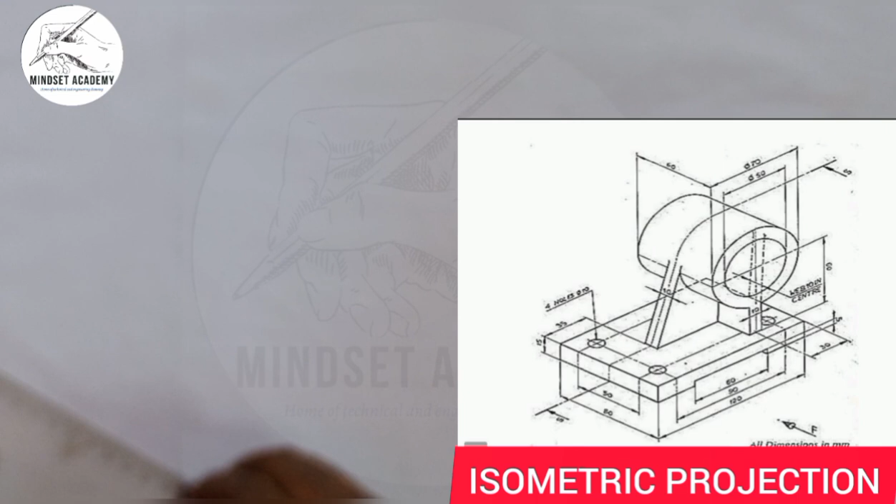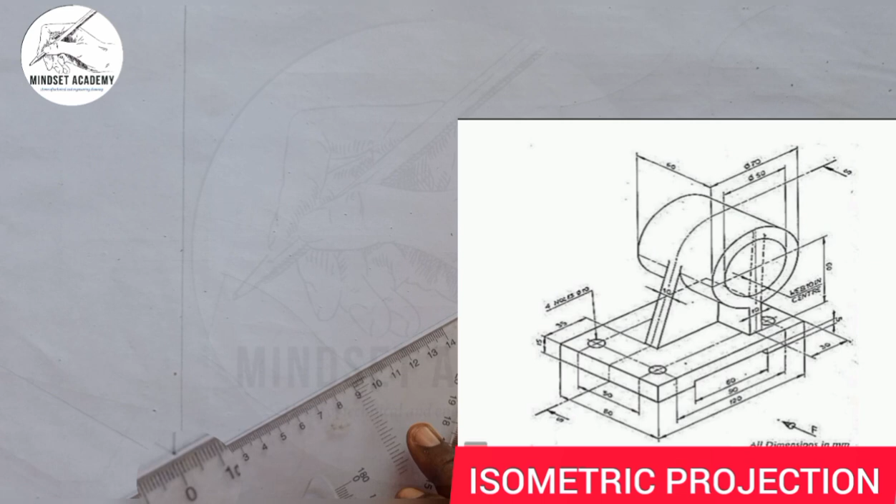Now, from what we have here, the entire length shown in the diagram is given to be 120. So from this point, I am going to measure 120. From 0 to 12 is 120, because they are all in millimeters.

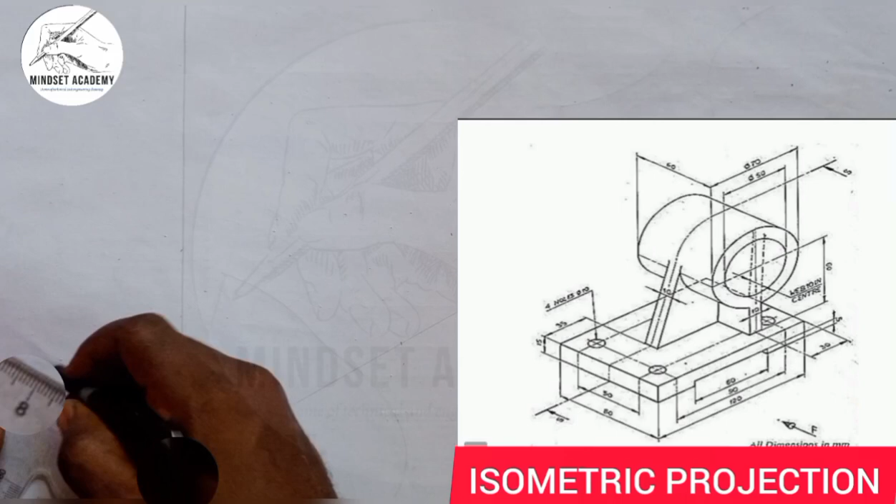Then the other part, I'm going to draw the width here, given to be 80. So I'm going to measure 80 from this point. From 0 to 8 is 80. And the height is given, if you add 15, from here to here is 15.

15 plus 60 is 75. And 75 plus 35, because the diameter of this outer circle is 70 and radius is 35, so when you add them you'll have 110. So the entire height here is given to be 110.

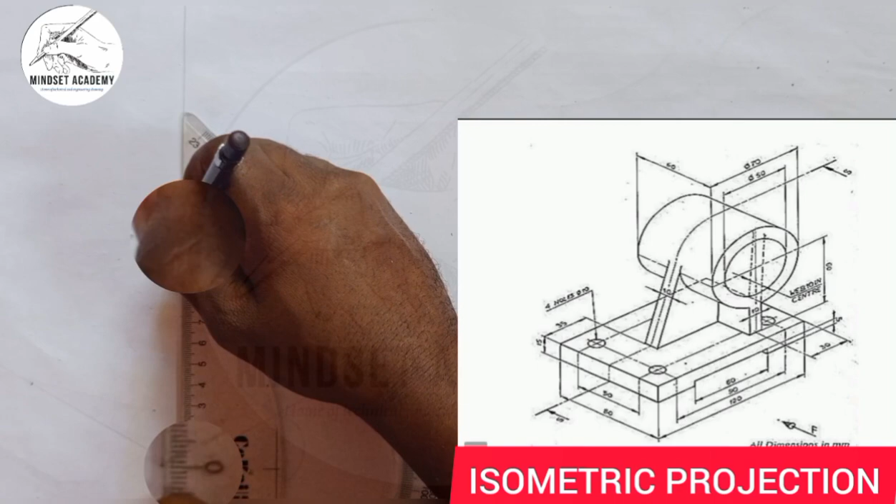This is 110, from 0 to 11 is 110. So I'll make it form a box, so forming a box I'll be having something like this.

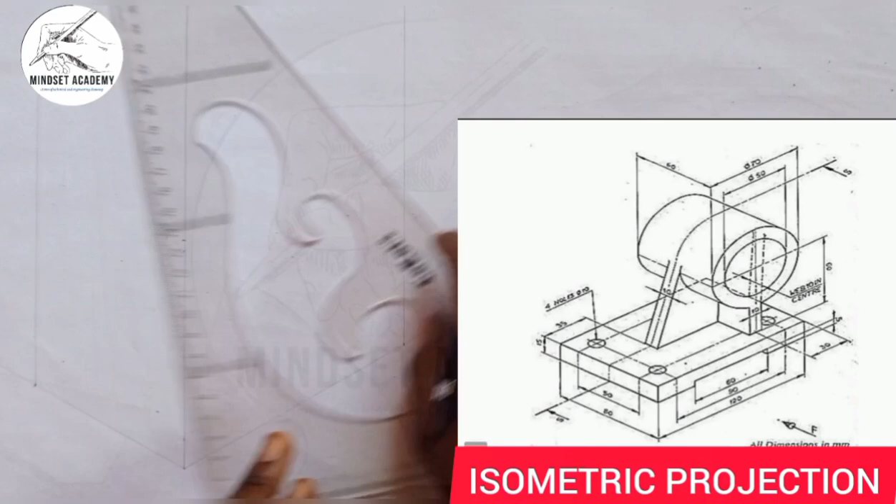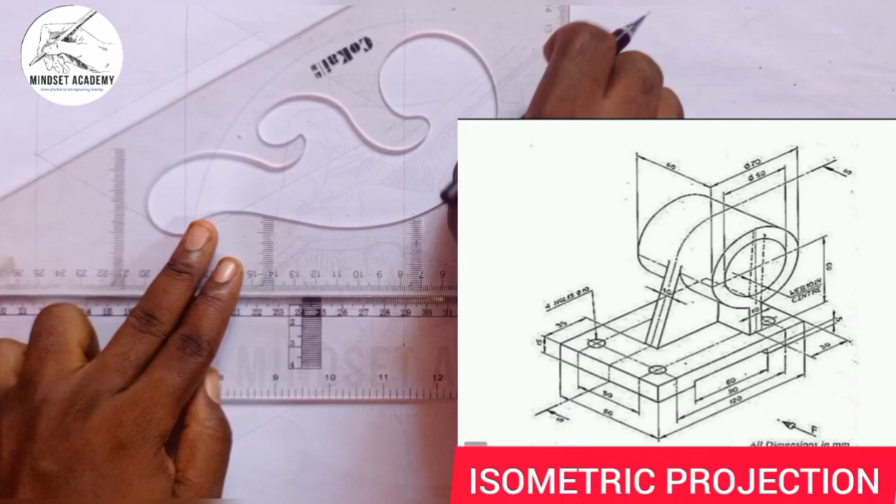From here I'll take it up, and I'll take it up. Then I'll close it up this way. Also I'll close it up too, and also I'll close it up too, and also I'll close it up too. So this is the box I have.

Then I'll start carving out my images from the box. First of all, we will start from the plane here. The entire length here we see is 80, and I can just take in that part, 80. So from here to here is 80.

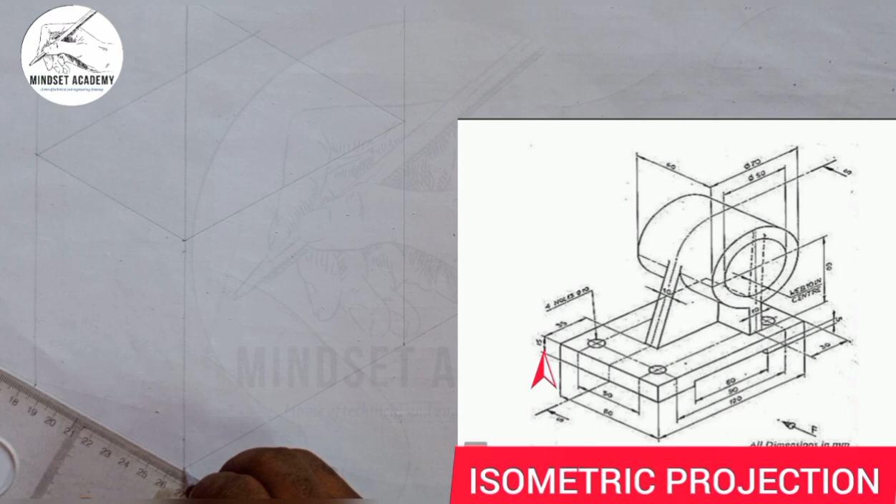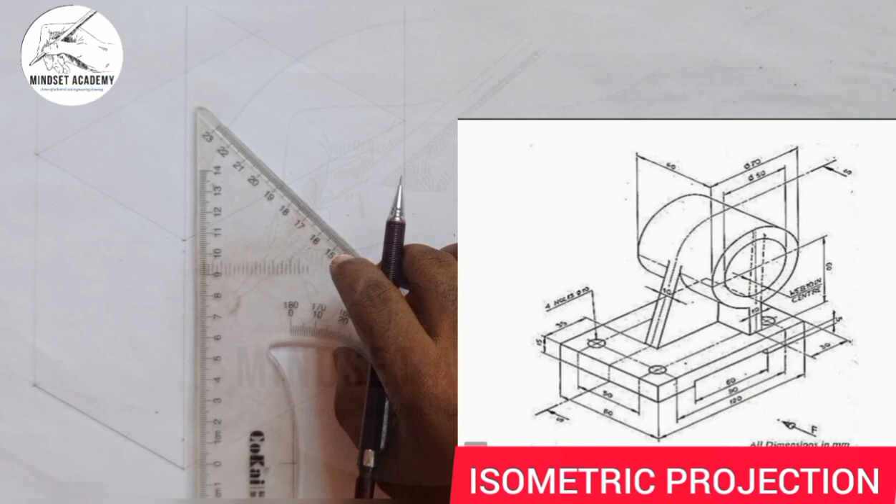And now taking it from here. Then the height is given to be 15. So I'm going to measure 15 upward from this direction here, from 0 to 15.

At this position, I'll use the help of my t-square, placing my set square on my t-square this way. And I'm going to take it in from this point to this point. Hope you can see that.

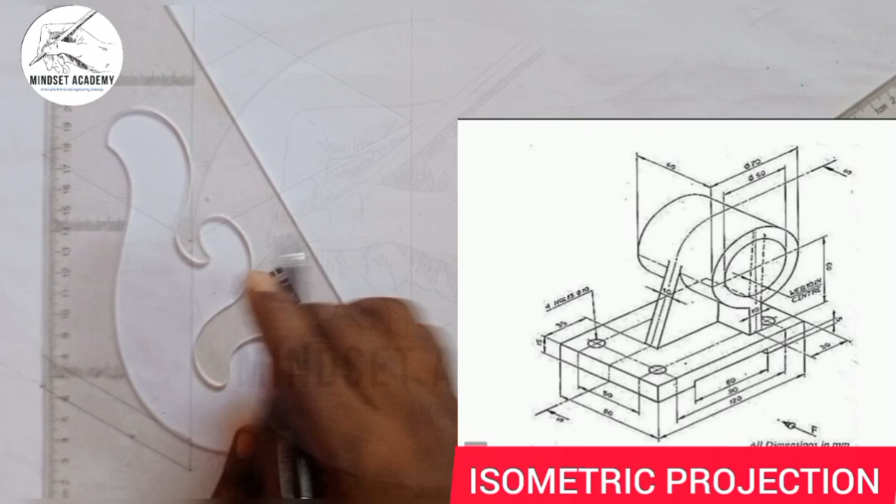And also I'll close it up. Now come here also, I'll close it up. So it is still uniform from this point - from here to here is from here to the ending of this line.

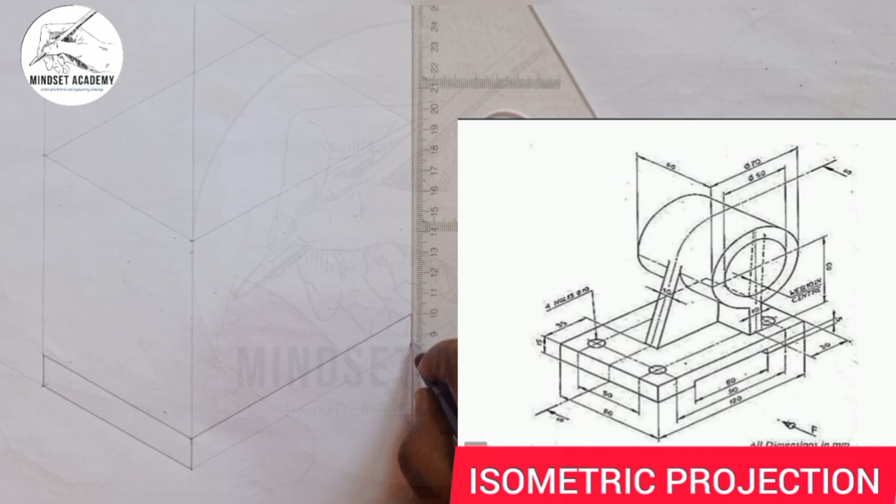Now from here to here is from here to here, which is thickened. Now the next one here we have is here to this point. We are not told, so what we'll do is get the half of 120. So if I'm to get the half of 120, that will be 60.

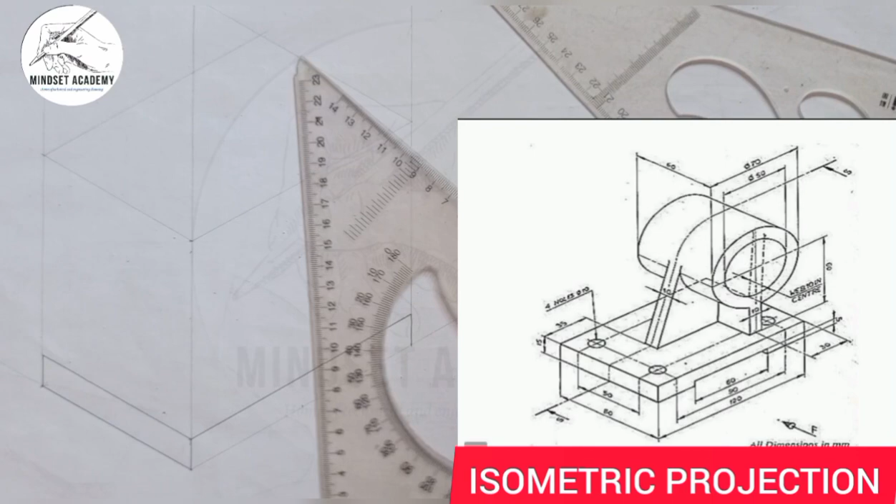So I'll just measure 60 here this way, from 0 to 6, is 60. Then I'll draw a vertical line a little bit up here. So if I draw the vertical line up here this way, it means that if from here to here is 60.

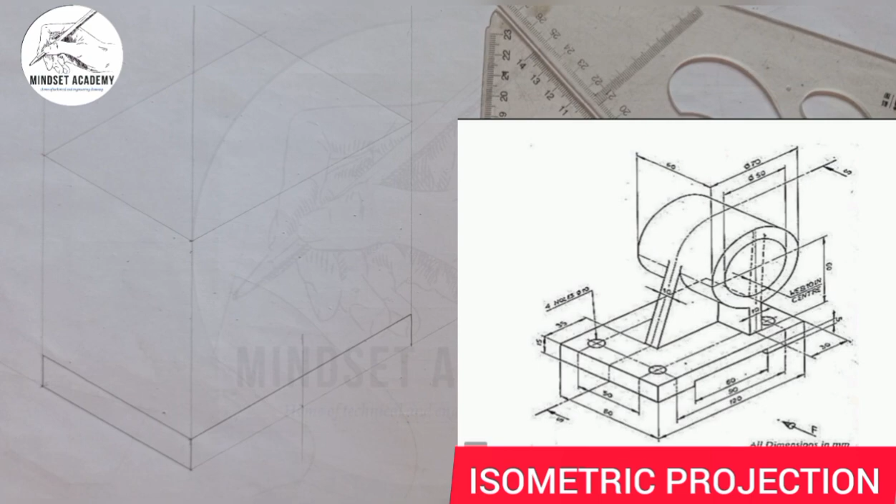Then I am going to measure 30 to the left and 30 to the right. So I can use my compass to do that trick. So you just place your compass here - 0, this is 30, and I place it at the center here. I measure 30 to the right and also 30 to the left.

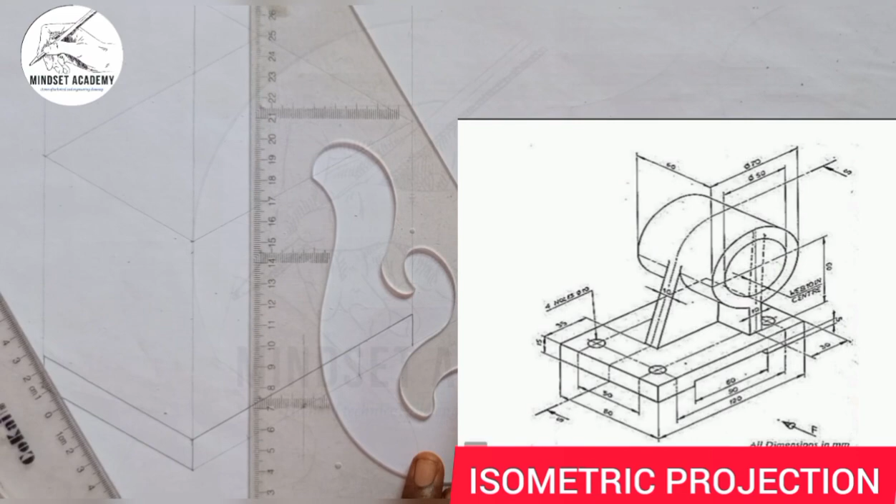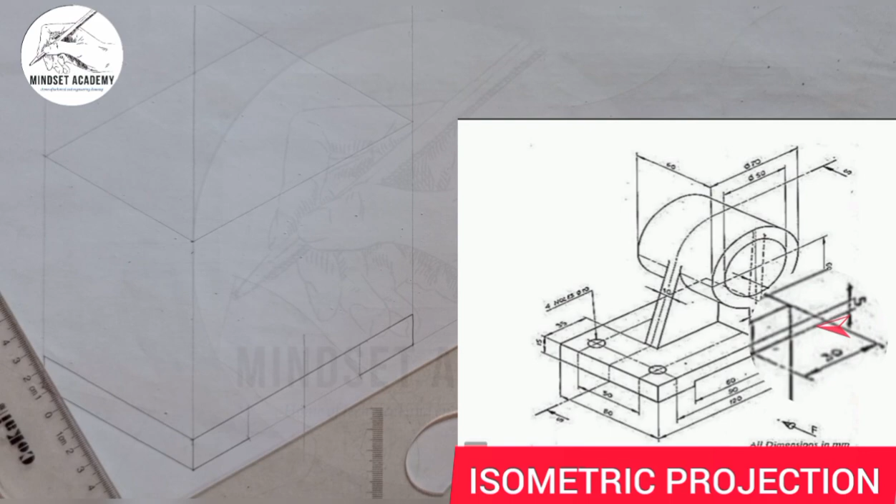Now the thickness from here to here is given to be 5. So let's measure the 5 millimeter from here, from 0 to 5, and I'm going to close it up with the help of my T-square and set square.

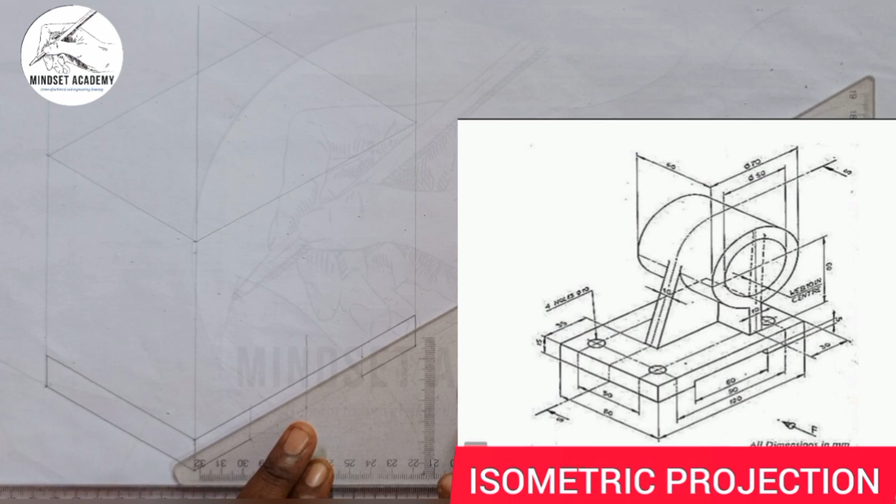Place it on it this way, and I'll close it up. And also I'll close it up, and also I'll close it up.

Now to show that this is a block, look at the diagram very well, you see a line here, so just place it on your T-square this way, and you close it up. Can you see that? And you can use your instrument to cover up this block here.

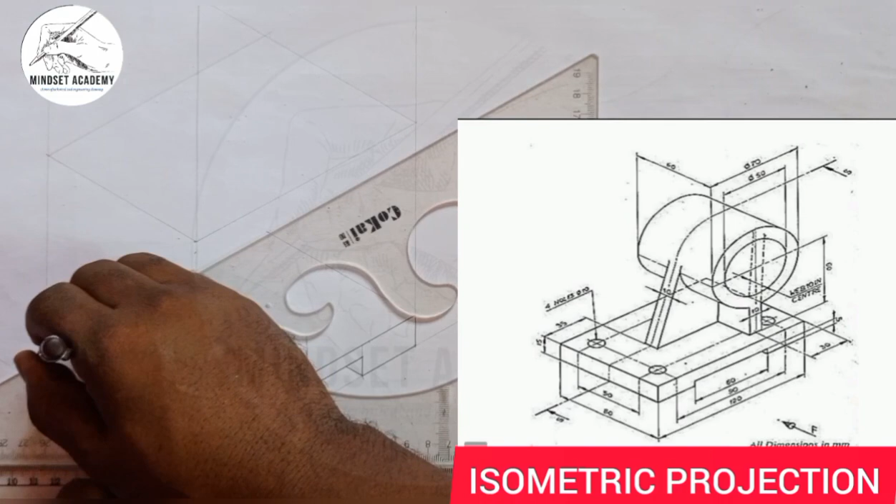The next important thing we have to do is get the center of the figure, since it is centralized. If from here to here is 80, half of it will be 40. So I'm going to measure 40 from 0 to 40.

Then I'll draw a line across that point this way. On that line, I'm going to measure a length of 30 - you see from here to here is 30. So I'll measure 30 from that point, from 0 to 30. Then I'll draw a line across that point this way.

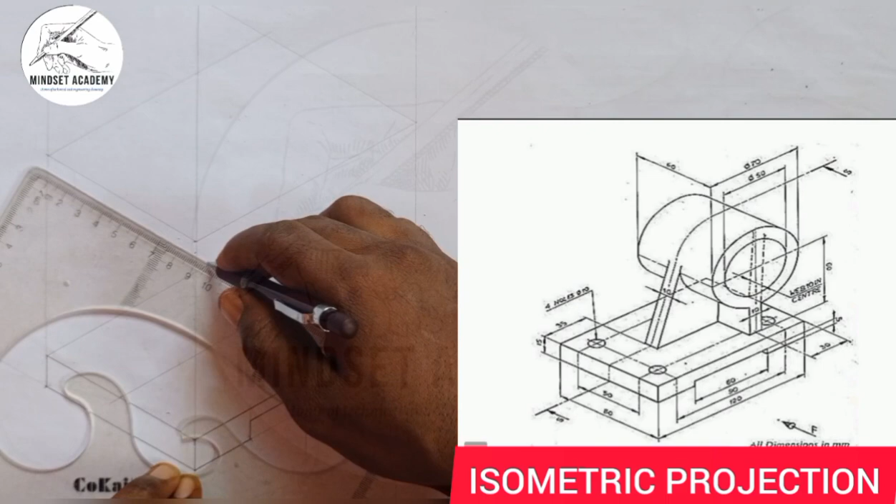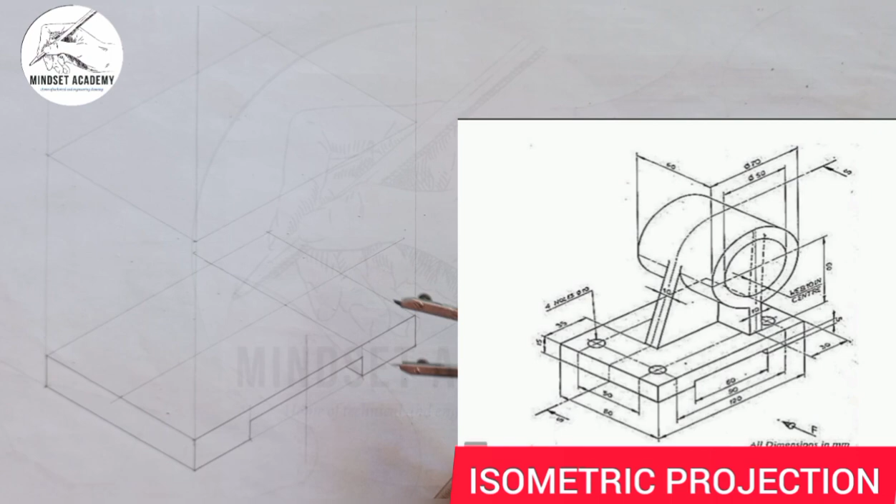Hope you can see what I'm doing here. Once I've done that, the entire length of this cylinder is 60, so I'll measure 30 to the left, 30 to the right. If I place it here, I'm going to measure 30 to this point and also 30 to this point.

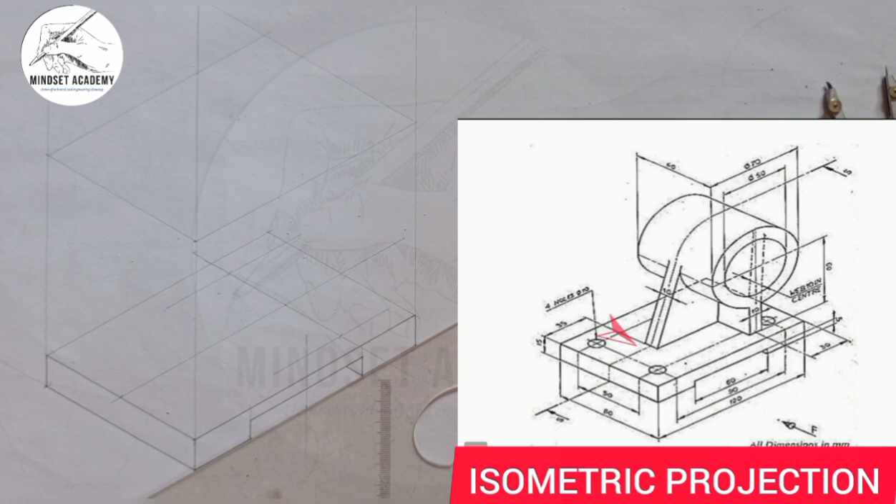I'll just draw a line this way first, and I want this way all together. Now if you look closely, from here to this end point is 35, from here to here is 35. So I'm going to measure the 35 from this point, from 0 to 35. This is where the line is going to stop - this is 35 we have.

So we can start moving forward now. From this point, I'll draw a vertical line upward - but before that, we know the thickness of these two figures is given. Let's draw the cylinder first. We have diameter of 70, and also that of 50. So what I'll do is draw out the box.

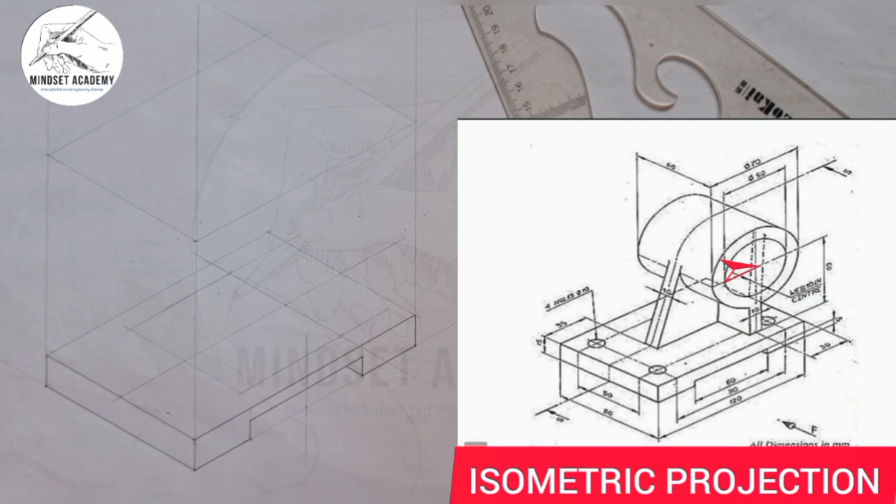How will I draw the box? I'll locate the center of this circle, which is 60. From here, I will draw a line upward this way, and I'm going to measure 60 upward. From 0, this is 60 here.

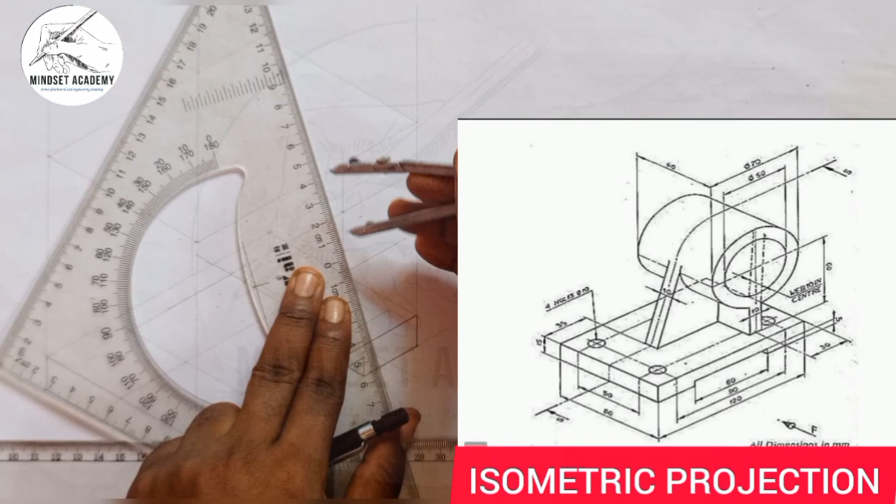That will be the center of that figure. On that point, I'm going to measure to draw my center line - this is what I'm actually focusing on. Since the total outer diameter is 70, I'm going to measure half of it, which is 35. So from 0 to 35.

I'll place it at this point. I'm going to mark 35 up, 35 to the left, 35 down, 35 to the right. This is what I'm going to form my box from.

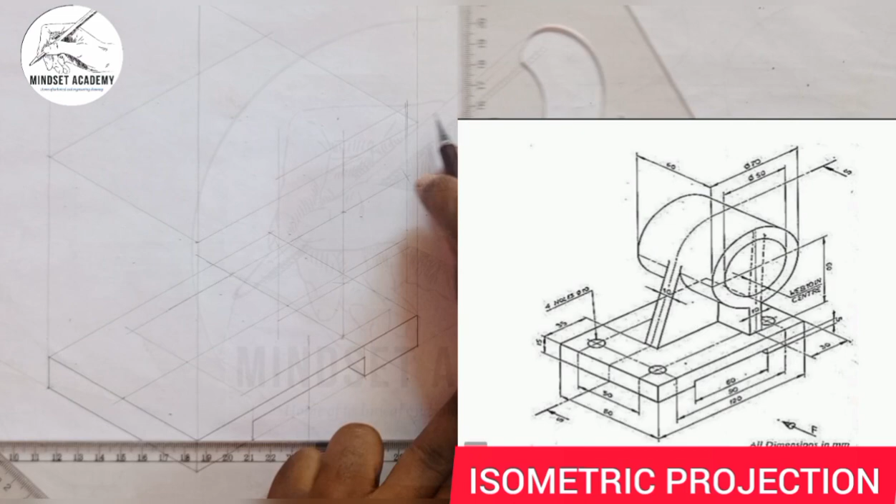These are the points - let me name them 1, 2, 3, and 4. This is the 4 points I'm focusing on. On that point, I am going to draw my isometric circle. But before I do that, I'll use this to draw a length of 60.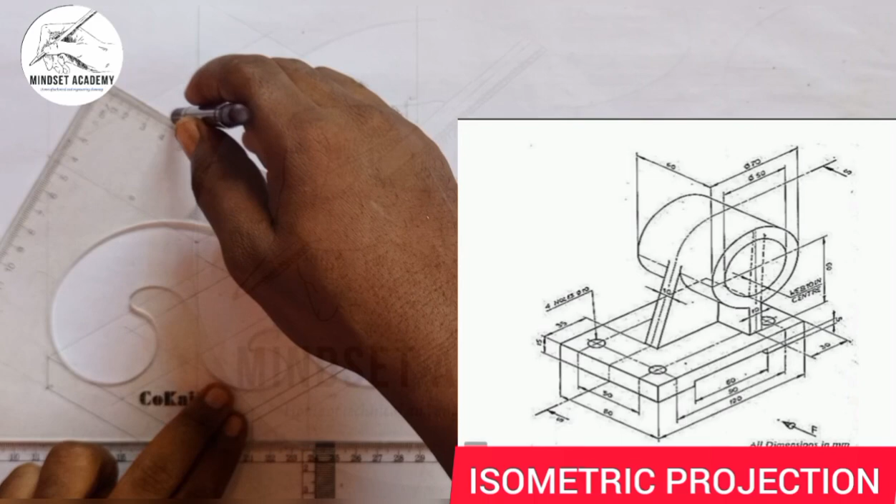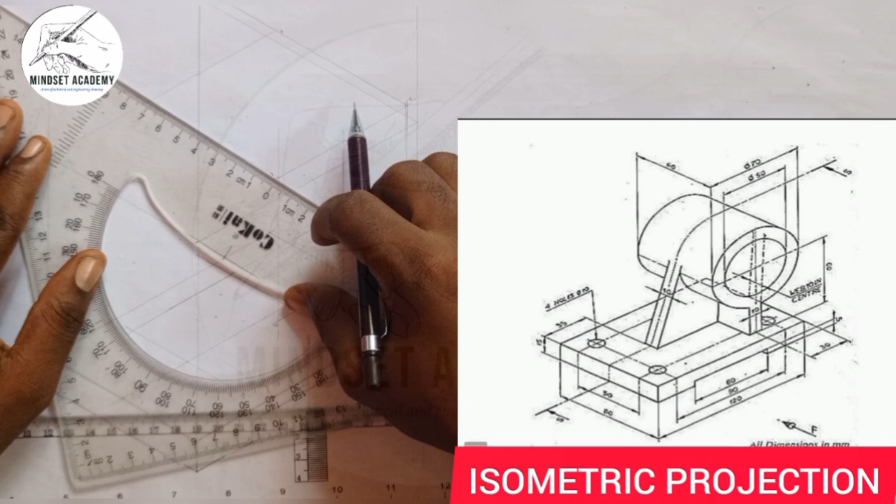If I should draw from here, I'm going to have a straight line this way, and from here also I'll draw a straight line this way. On that line, I'll now measure 60 - from 0 here to this point is 60. And I'll close it up.

This is what we're actually focusing on - please don't get confused with the figure. From here to this point is 60. That's what we have there. So let me just bring it down.

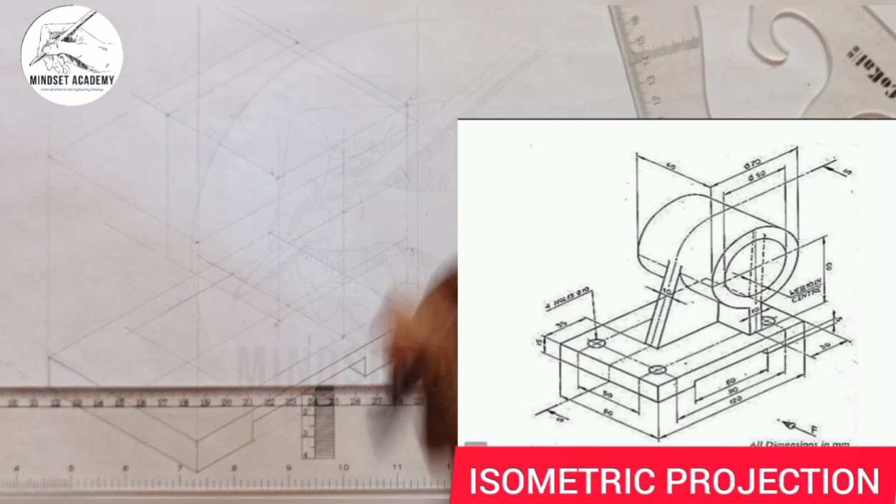So I brought out that length of 60. Let's confirm that again - it ought to be 60. Yes, it is. With that, we will move forward and draw out the circle that we have here. We know that from this point to this point is 70, and from here to here is 60.

So we'll start drawing our diagram out. First, let's draw the circle that we have here. Connect the longest diagonal, then connect from 3 to this point, and from 3 to this point. This is what we have here, from here to here. So I'm going to use my compass to draw a circle that will connect these two together.

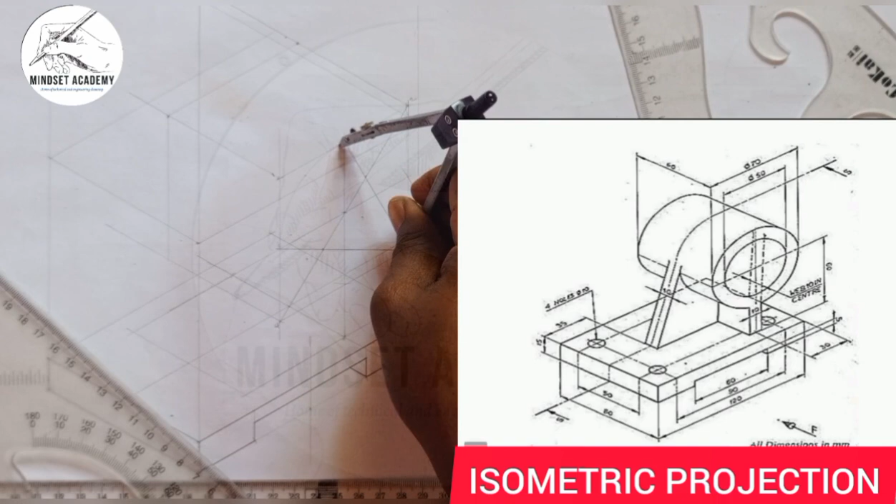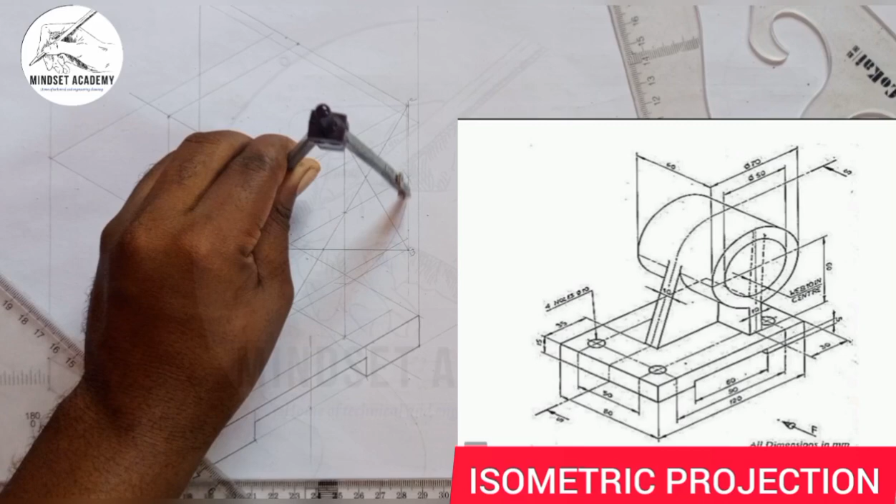Then I'll come here also and do the same thing. I'll come here too and do the same thing.

Then here also, I'll do the same thing. So it is from this point we are sure that the thickness from here to here is 10. So I'm going to measure 10 with the help of my instrument here, from this center point, this line I drew up first of all.

From here I'm going to measure 10, so this is 5 to the left and also 5 to the right. So I'm going to bring it down to touch the base, right, in this way.

From here too, you can see that. Then I will thicken the rest in this way, right? So this is one of them that we have here, and the rest is also, there's another one at the center, right? We have a hidden circle, but if I do that, let's move forward.

So at this point I can easily do the same thing, get the center of 60, which is 30, because it is centralized. This web here is centralized, so I'll get the center of 60, which is 30. So this is 60, this is 30 here, and I'll measure 10.

From 30 I'll measure 5 to the left and 5 to the right. So that is where I'm going to place my circle. So let me just use it to form a box. Right, so that is the box I am forming.

You can see that. This is where they are. So I still need one more part again. So project this inward this way and this inward this way. Then I want this to touch the line. To touch the same line, let me call it 0.5, right?

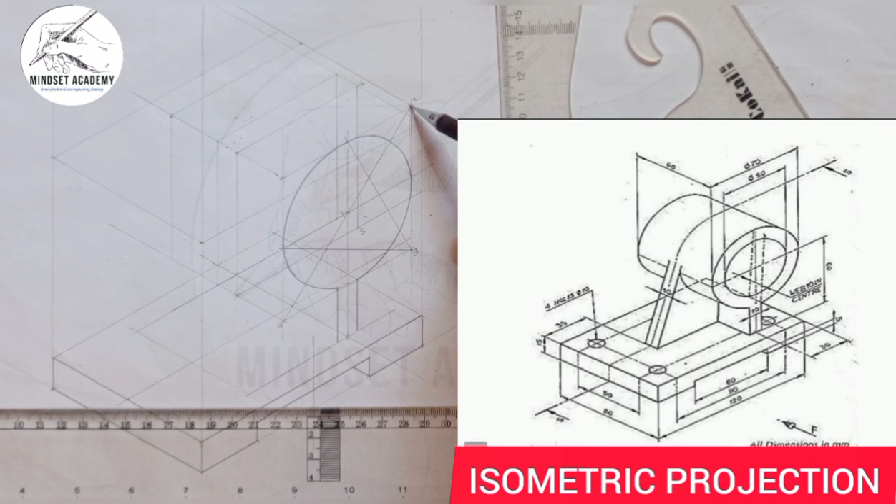And 0.6. So do the same thing here too. From here, this to touch the line. Which is at this point here, 0.7. So since I connected this diagonal from here to here, I also connect diagonal from 6 to this point here.

Also connect diagonal from here to this point here. You can see that. So I'll do for the last point here too. Wow, it ought to be touching this line here. So to touch the other line, sorry, touch here and here.

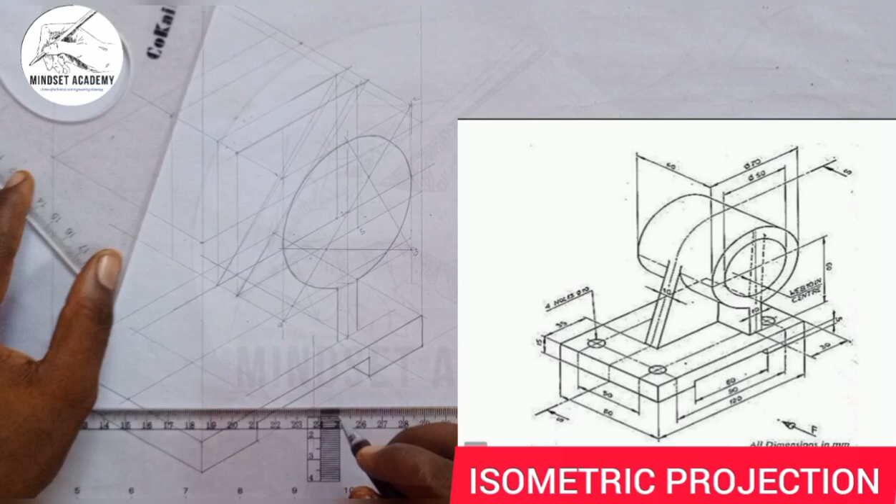So meaning that from this 6 here to touch this point here. So don't get twisted. From 6 to touch here, right? Then from 6 here also to touch here. All together. So this is what we're focusing on.

So what I need is I will transfer the point from this point to touch this point and to touch this point here, and from here to touch here and to touch here. These are the 2 points.

Let me call it point A, point B, C, and D. So I'll draw a circle there. Also, I'm going to connect this last point to this point here. To transfer that point also to that point.

So I'm repeating the same process. So this point should be on the same point here, and this point here should be on the same point here. So let's see.

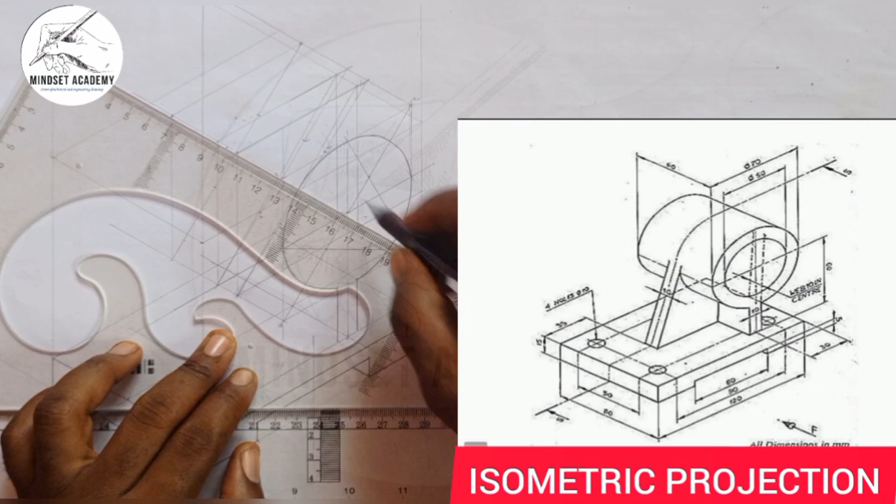Now we also need the baseline here, right? Just draw this way. And we bring it out. So if I should bring this

is touching here, right? And this also is touching here, and this also is touching here. It's touching here. This is what we have here, these 2 points.

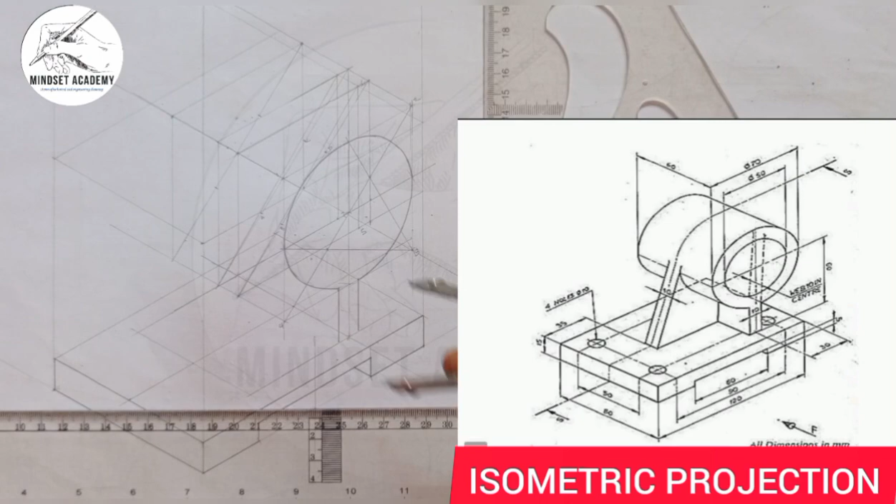So while I'm doing all this, you're like, what's this man doing here? So you take your instrument from this point. We know that this point here, if I transfer it from here, is this point here.

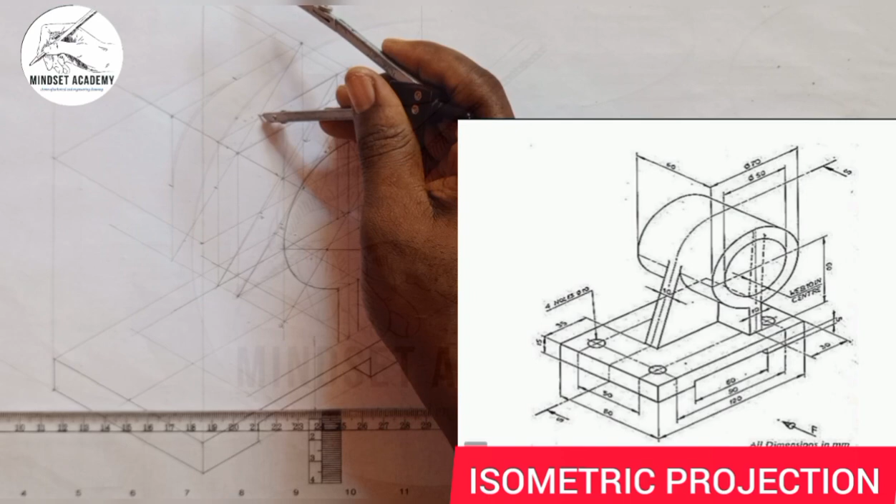And this point here is this point here. So I'll just connect it from this last point to this point, and I'll get this. You can see that. And this other one from here to touch this point here. So I can easily use my instrument and connect these 2 points.

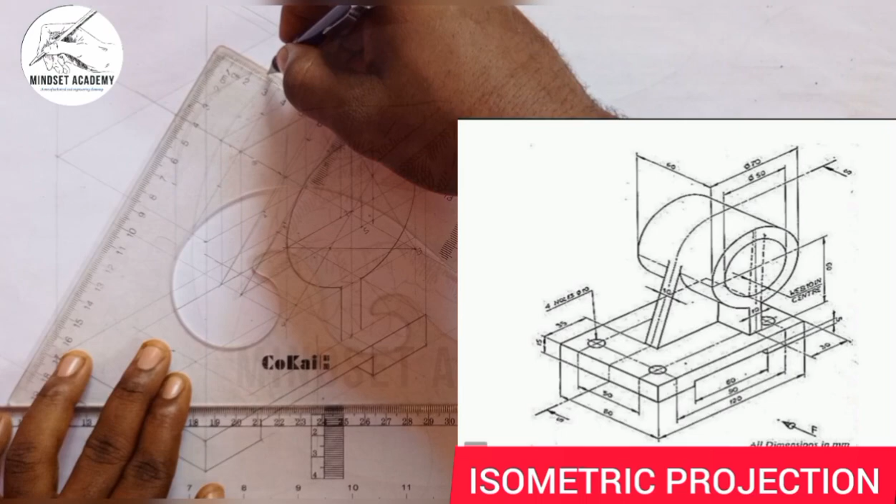Right, and the other one from this point. If I measured, from here, I pick up a point and I measure 5 to the left and 5 to the right. So I'll do the same thing here, 5, 5 each. All together, 5, 5 each from this point.

So from here, let's draw a front line first. First of all, let's measure 5, 5 each. So if I come here on this same line here, remember I have this point to this line, and I'll do the same thing that I did here.

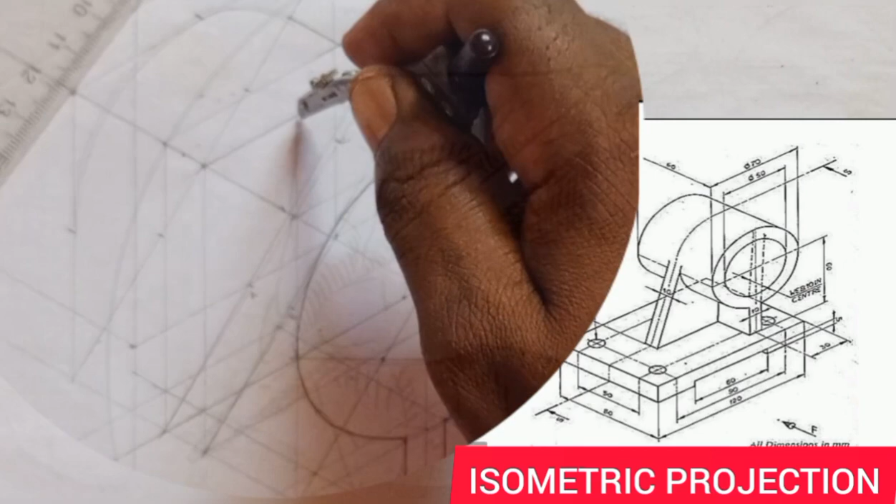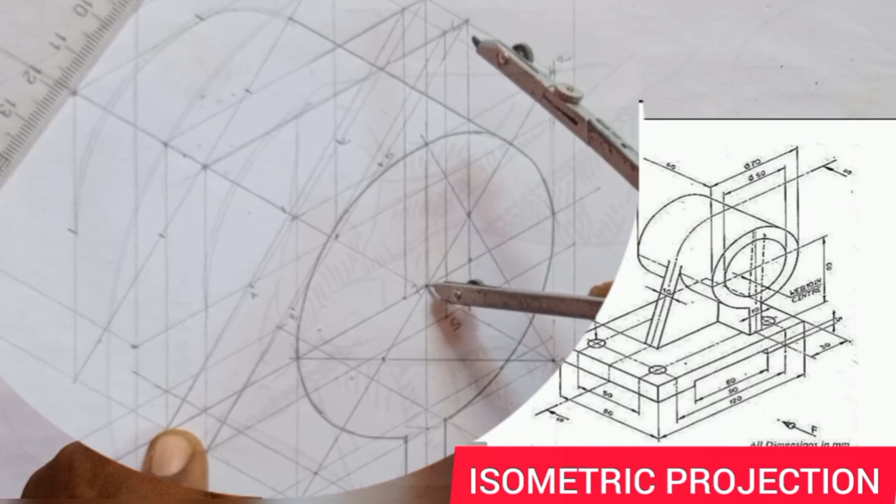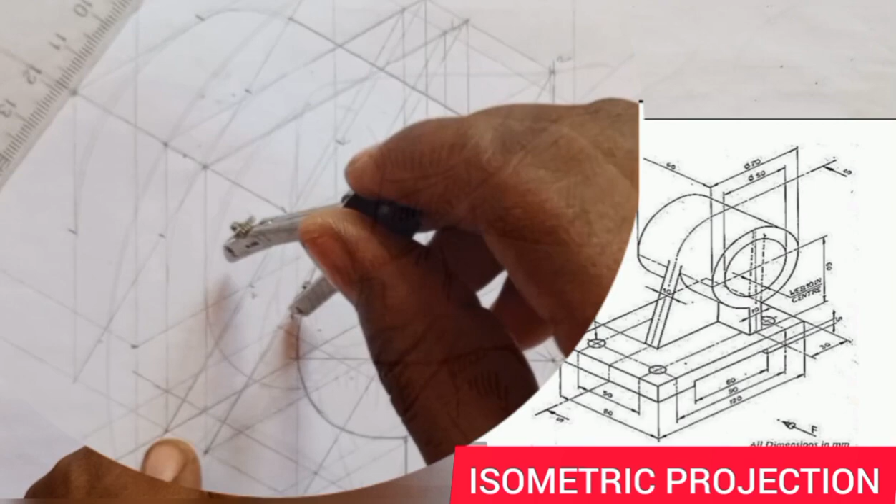This line here, right? That is this. And the next one, which is 7, will be on the next point here too. So if I should place it at B, I'll have this. If I place it at A, I'll have this. So this is the 2 point I'll move to touch here on my diagram.

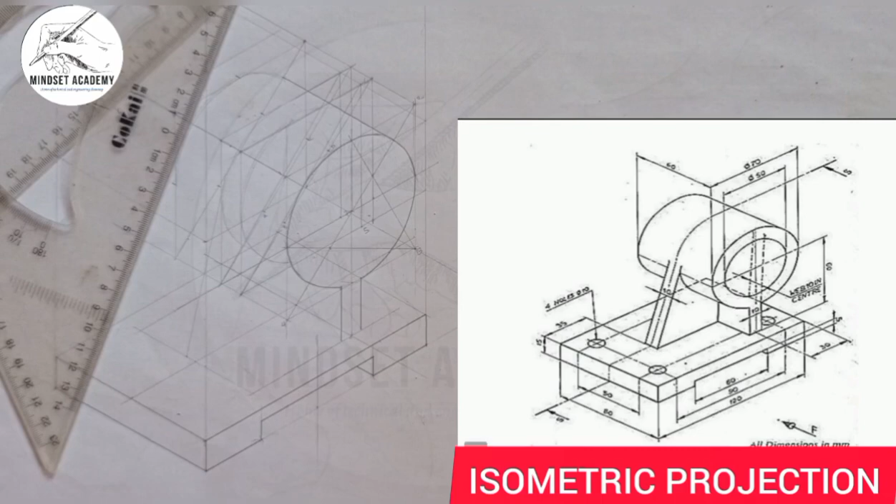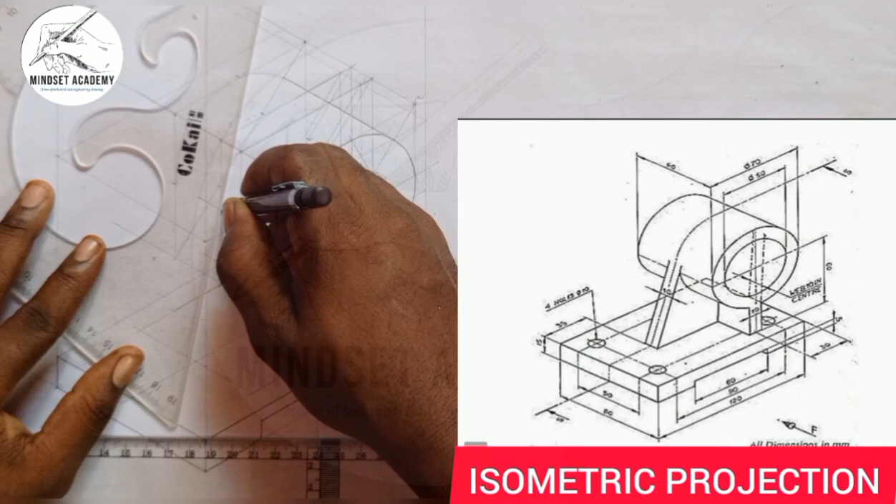But it doesn't necessarily come from the top. It's more from the center line here. And this is the center line at this point here. Look at it here, this line is the center of the circle. So that means whatever I'm doing should be from this side here. So this is where I will draw my line from, and from this point too.

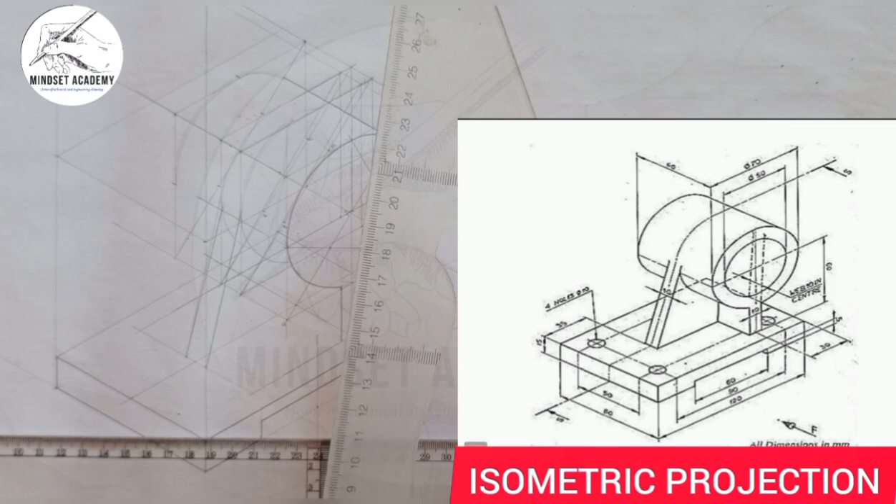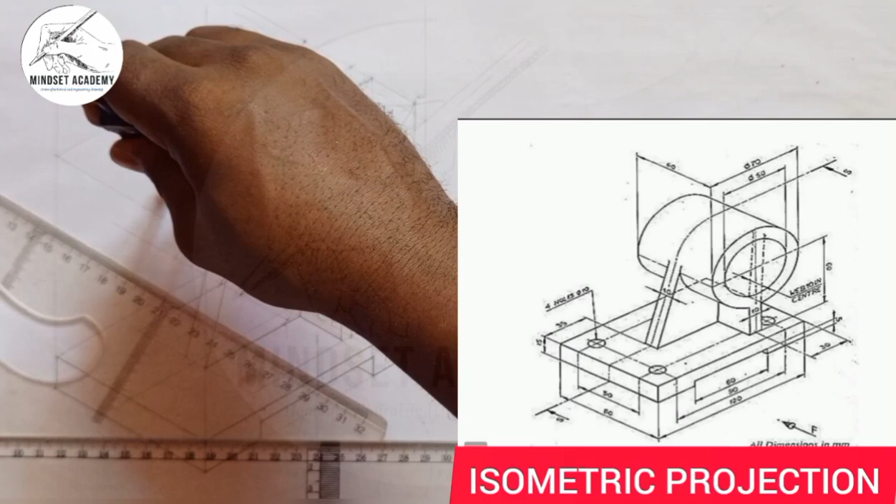Right, so I'll just take this. Let's see, from the baseline I'll take this in. So take in, and I'll take this in. Now this is going up, and this is closing up. Right, then this. So just close it up.

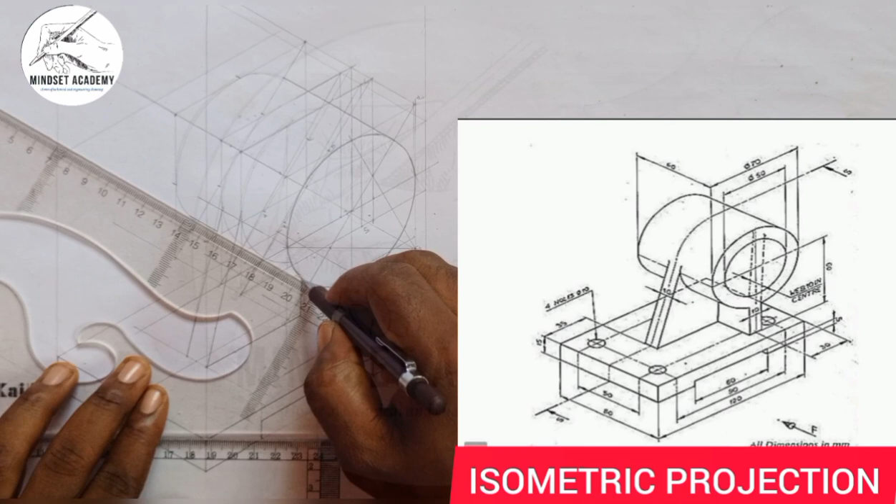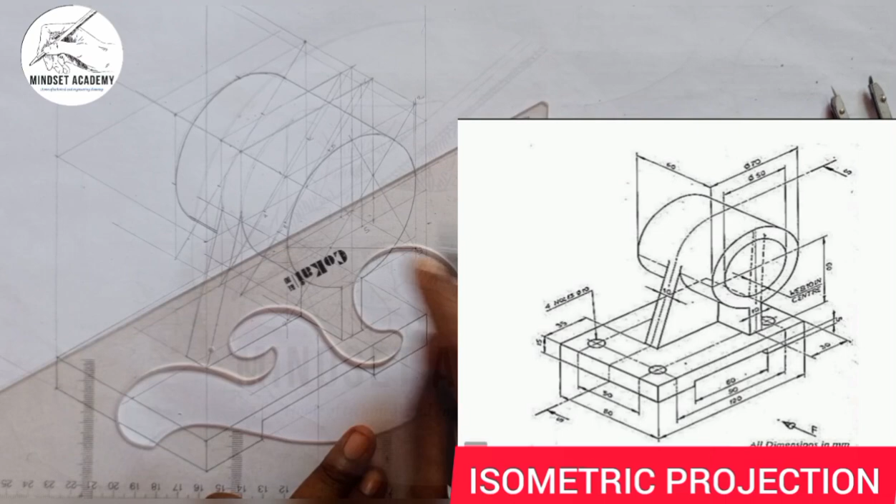Sorry, from here. Two. Let me take it out. So I can now take it here out. Also, I'm taking it out too. Also, and here too, and here too. Alright.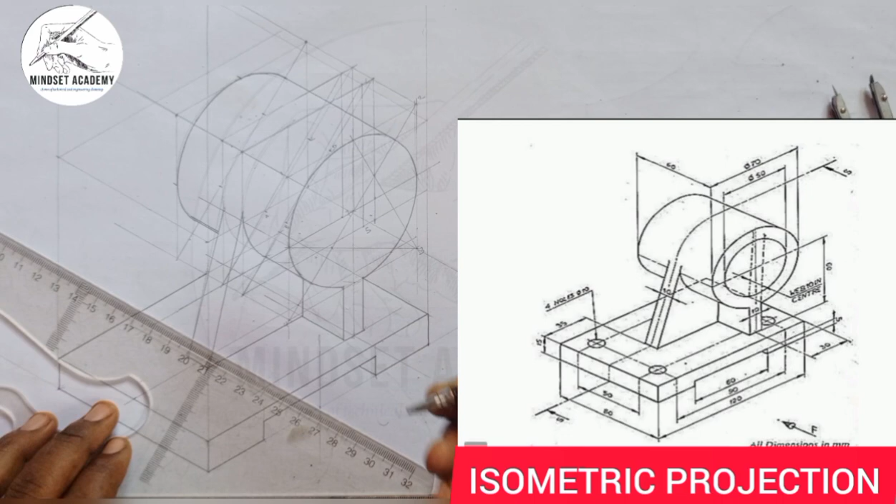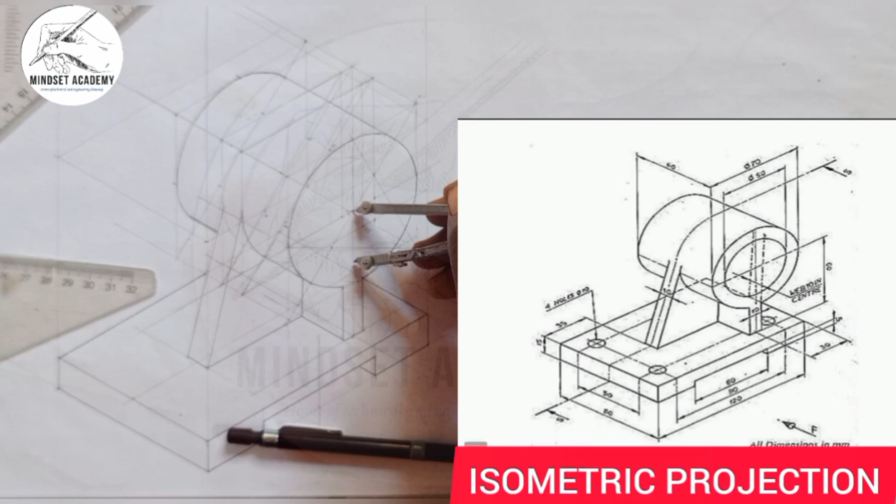So now still remaining the internal circle here. I won't stress myself since the diameter is 50, I'll just measure half of 50, which is 25. Measure half of 50, which is 25, and 0, which is 25 here. And I'll place it here at the center point. 25 up, 25 down, 25 to the left, and 25 to the right. Right, and I'll take this, draw my box out.

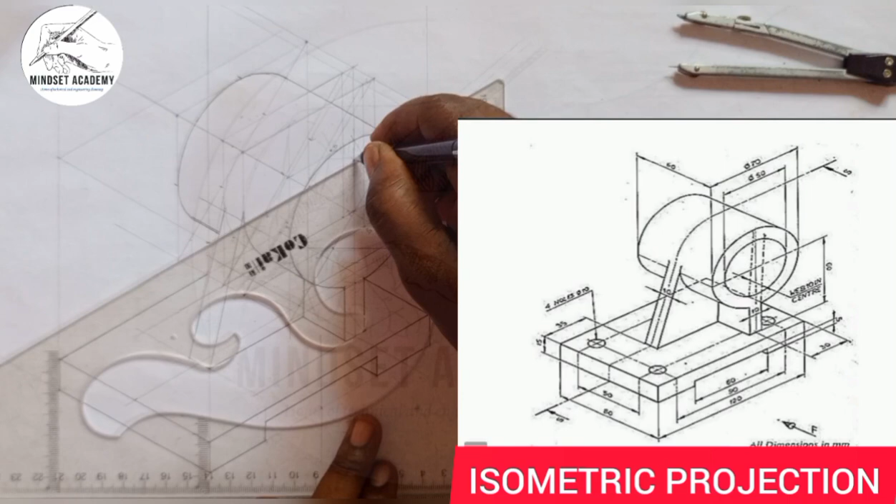So I'll just pick a point from where they meet here, where this line and this line meet. I'll draw a line to touch here. I'll draw another one to touch here. So this is where they're meeting here. So I can now take my compass, place it at this point. Have this.

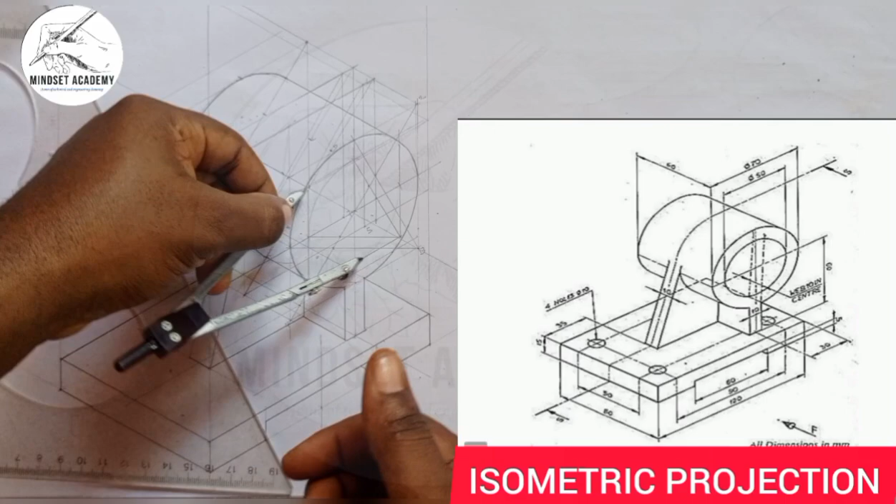Alright, I'll come to this end point too, I'll do the same thing. I'll come to this point too, I'll close it up. Then here too, I'll close it up.

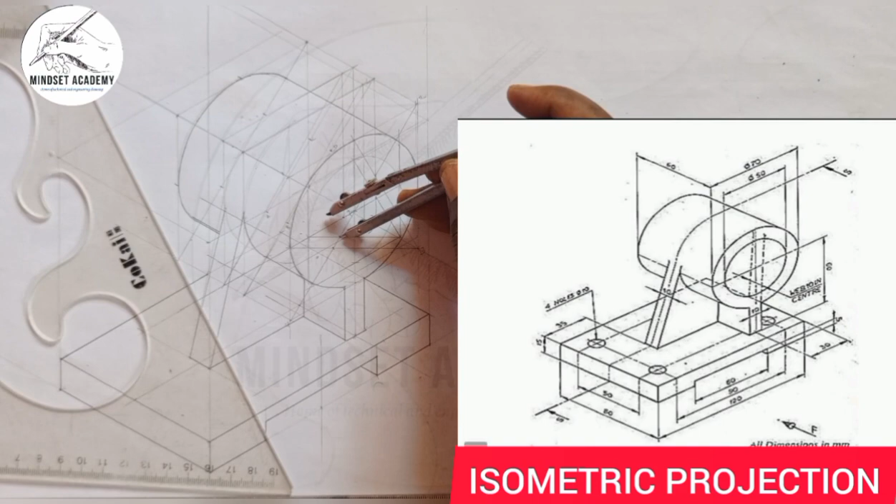So I should be taking it out now, so we'll see. Now doing that, we still have some circles at this point here. Are we together? We're told that it is 50 millimeter apart. So what I'll do is I'll take half of it, which is 25, 0 to 25, and I'll place it here. I'll mark 25 here and 25 here. Then I'll just draw a line on that point this way, and this point this way.

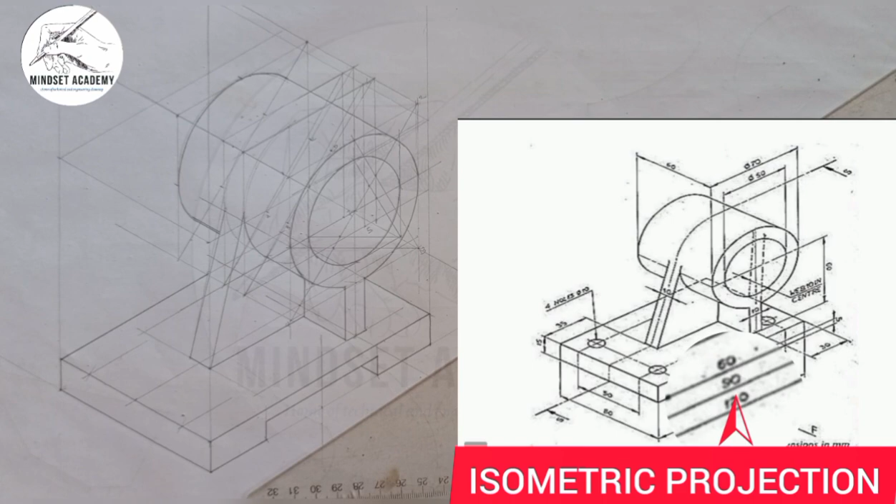So where the circle is situated is 90 millimeter, 45 millimeter away from this side. How did I know? From here to here is 90, right, these two circles is 90. So if I measure 45 on my meter rule this way, 0 to 45, I'll place it at the center point here. I'm going to mark, or from this point, I'm going to mark 45 here, 45 here. So that will get to the center of my circle. So from here, this will be where my circle will be placed at these two centers here.

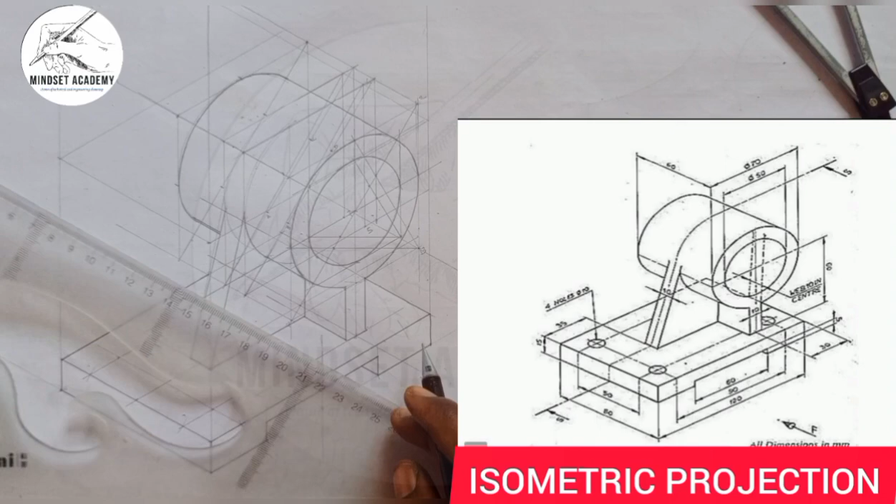Even the other one here too, 30, from here also, we have the same thing too, right? So if it's 90, if I just place it from this point around here, following this line around here. So where the points meet here, that will be another center here.

All together, and we are given 4 holes diameter 10 each. Is that again? 4 holes diameter what? 10 each. So each of these are 10 millimeter each, and they look very small. So what I'll just do here is this. Since it's very small, I'll look for my French curve and look for the one that's diameter 10, and I'll just place it here.

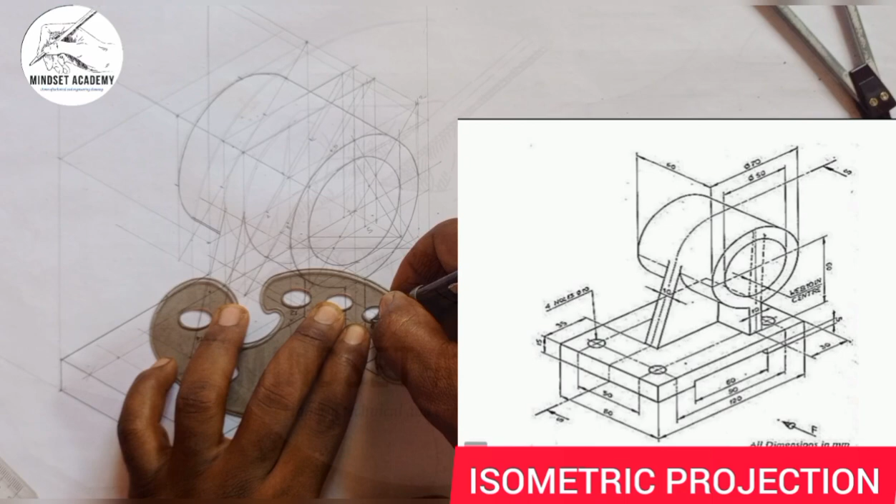Hope you can see that at the center, ensure that it's well centralized. And I'll just draw this stuff here and stuff here. Right, I'll come here too, I'll do the same thing. I'll come here, I'll do the same thing.

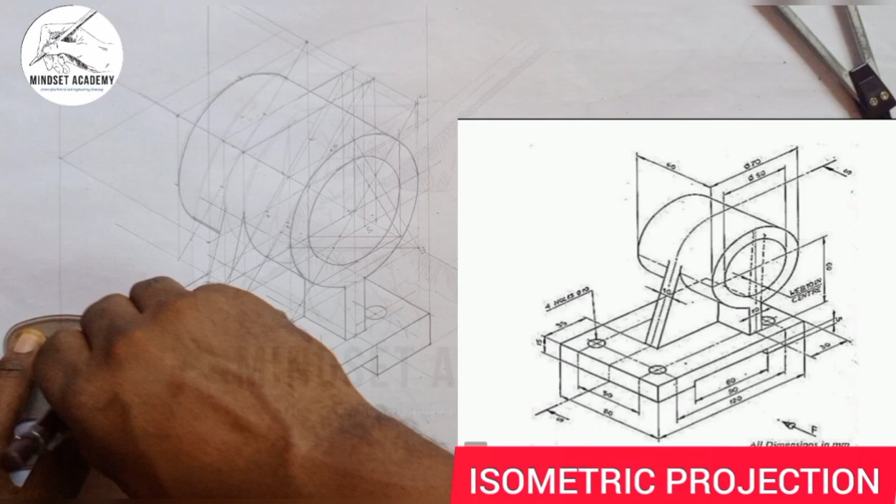You can see that, so we have successfully reproduced the figure that you can see at the right hand side of the screen, right, in isometric. Now in our next video, we're going to be drawing this in orthographic projection.